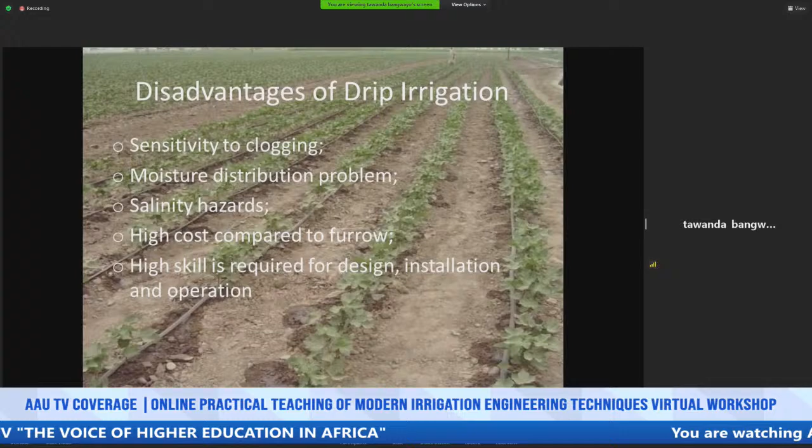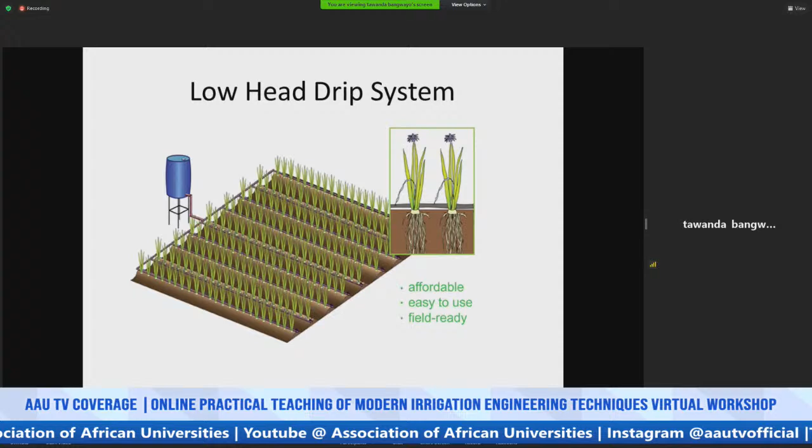So the area you have also determines the storage tank you must have. This system is a low head drip system due to that stand, which can be a meter high. That's why it's called a low head drip system. The next slides will take you through some of the components. This one is affordable, easy to use, field ready. Someone who is hands-on can install such a system on their own.

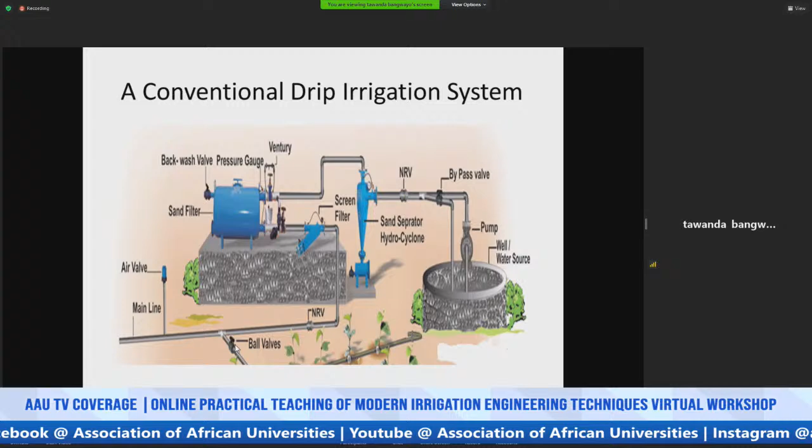There are different pumps that can be used. This one is centrifugal, but some can use submersible pumps which are inserted into boreholes. So we have the air valves, which will be removing the air inside the system, and also the ball valves. In different systems, the larger the system, the more the air valves and ball valves will be increasing.

The drip system layout has the lateral, which is the final line which supplies water to the plant, the distribution line, and the sub main line. There are different terminologies for these pipes. They are also called poly pipes or poly tubes. And there are other devices that are used, such as end caps or end stoppers used at the end of each lateral. We have the drippers or the emitters.

We find that some pipes or laterals come already manufactured to emit water, but some have small components or devices that you have to punch onto the lateral so that it can release water.

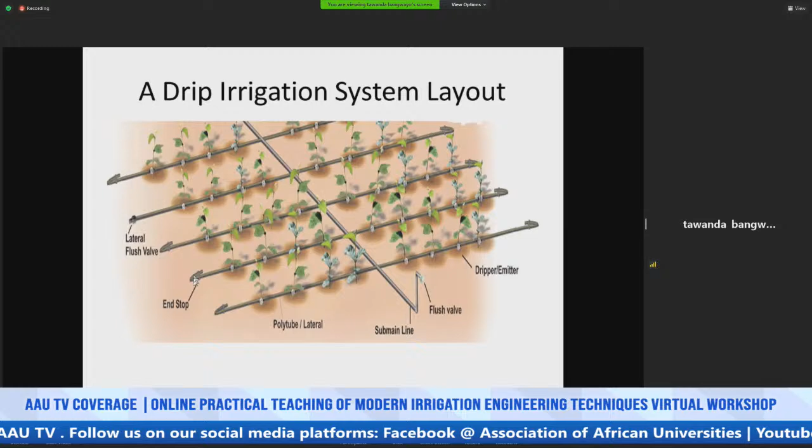So there's this one, the flush valve, whereby in instances, say in clogging instances, you can use these flush valves, or open up these end stoppers to flush the system or the pipeline.

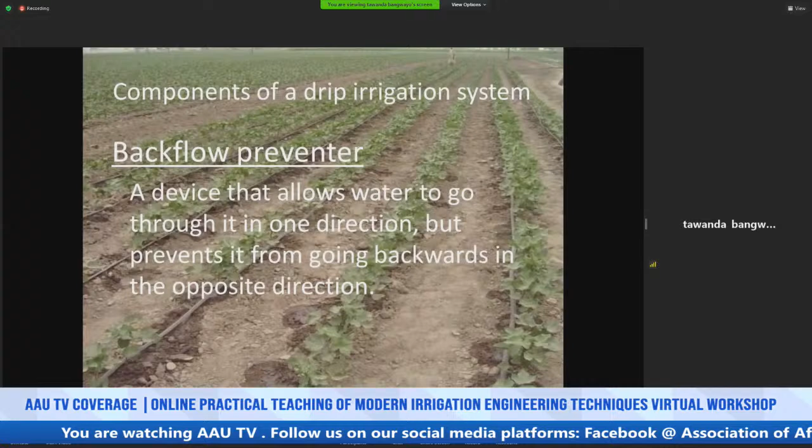So I find that the drip irrigation system involves other components such as the backflow preventer, whereby it prevents the backflow of water, as drip is used in mainly most or any topographical land. So I find that in a system, the water can flow back. If it flows back, it affects the distribution of moisture. So there's the backflow preventer.

There are the valves, whereby some are manually or automatically operated. Manually, we'll be having a worker who will be opening such valves, and automatically a valve can be opened through technology. So I find that there are filters, and there are different types of filters. There are disc filters, sand filters, and media filters, which are industrially manufactured devices installed in the system to prevent dirt or debris from clogging the emitters.

Then we find the pressure regulators. These components will be installed in certain parts of the drip irrigation system, where they will be regulating the pressure of the water passing through at a certain point. So these regulators will be reducing the pressure of water if it's high, or building up pressure in the system if the pressure is low.

Then we have the pipe. These are the poly tubing or the rigid PVC. Some are now adapting to use the HDPE pipe, which is a high density pipe, the ones that normally come in black. Others are developing other pipes to use.

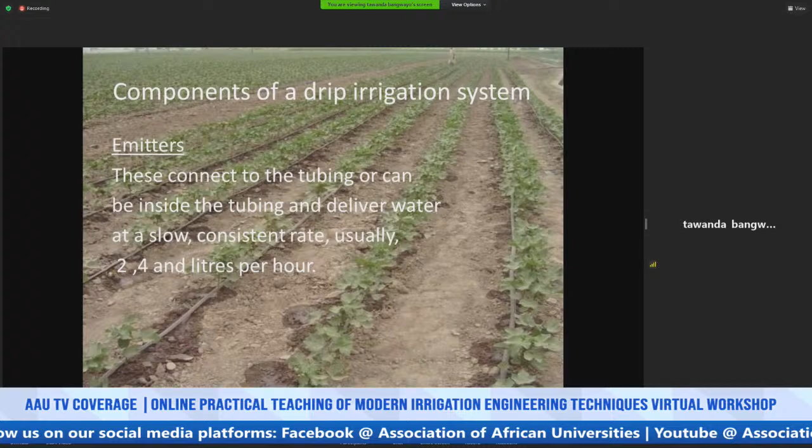Then we have the microtubing. These are our 1/4 inch spaghetti tubing. These are much smaller compared to the regular ones that we know, where the normal ones come in 20 millimeters or 16 millimeters. Then you have the emitters. As I said, some emitters come already installed in pipes or already designed to let out water. Some emitters are made to be connected onto the tubing.

Then there are two categories of emitters, the pressure compensating emitters and the non-pressure compensating emitters. The pressure compensating emitters are designed to discharge water at a very uniform rate under a very wide range of water pressure or wide ranges of topographical landforms or features in the field. And also true pressure compensating emitters give essentially the same flow at 3 bars, as they do at 1 bar.

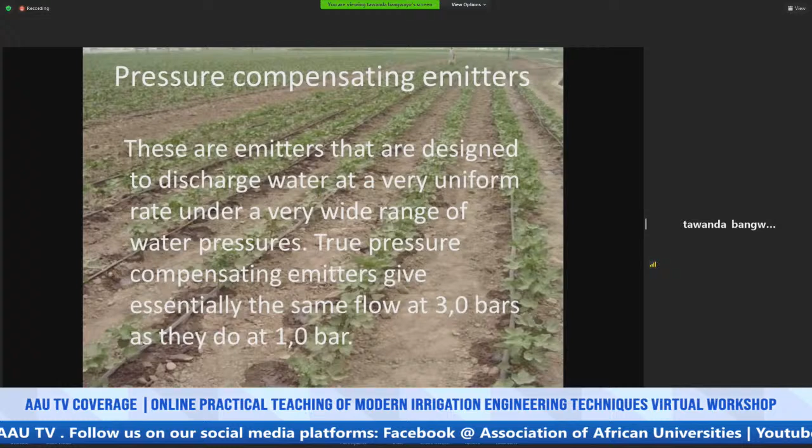So in a system where water will be supplied or pumped, some pump water at 7 bars, depending on the size of the system. Some emitters allow water at 2 bars. So these pressure compensating emitters will be regulating that pressure: if the pressure is coming to the final point at 3 bars, it reduces that 3 bars to 2 bars. And if the pressure is lower, at 1 bar, it builds up more water and lets out the water at 2 bars.

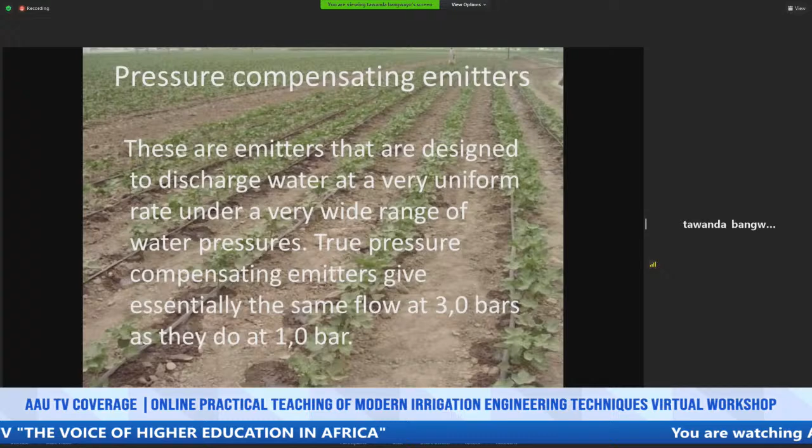So these pressure compensating emitters are normally useful in areas with elevation difference, referring to topographical differences. Then there's the non-pressure compensating emitters. These non-compensating emitters' output will vary with change in elevation and pressure. So these ones will be heavily influenced by the elevation and pressure.

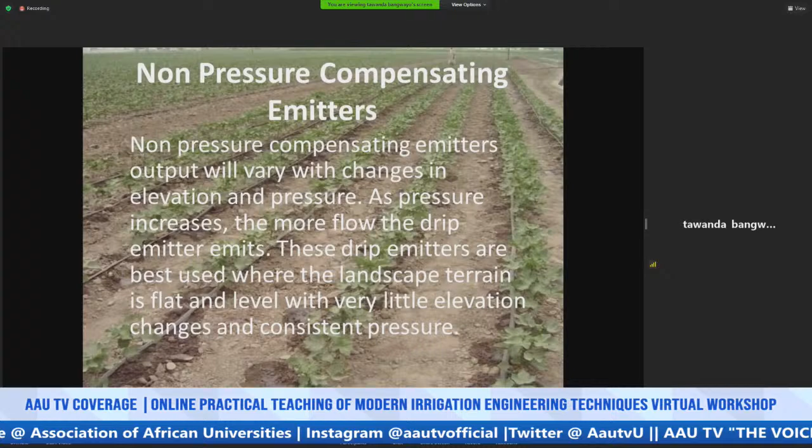And also these ones do have sort of an advantage compared to the pressure compensating emitters, because if you have a leakage, the pressure will be building up, rushing to where there's a leakage, unlike this non-pressure compensating, so the emitting of water will be generally continuous as compared to the pressure compensating emitters.

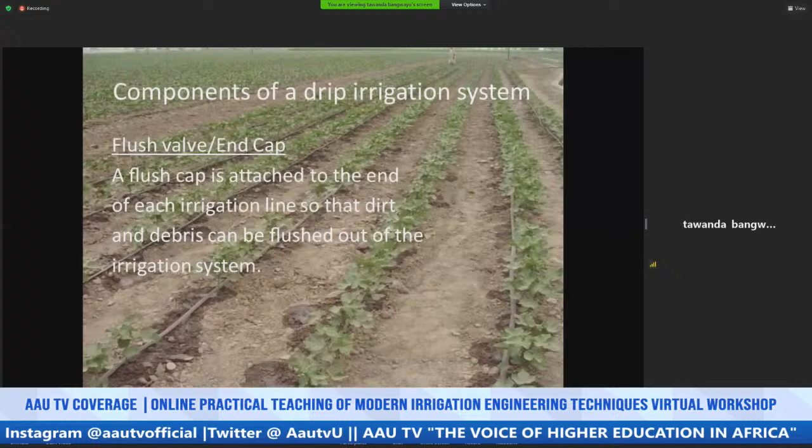So in general, generally 30 to 70% of the area is wetted depending upon the plant spacing, the nature and the development of the root zone. And also components of a drip irrigation system. This is a continuation whereby we have a flush cap which is attached at the end of each irrigation line or drip line so that dirt or debris can be flushed out.

And also the design parameters. We find that drip is suitable for an area as little as 1 meter by 5 meters to a large area of maybe 50 hectares. So drip irrigation can be designed according to the available space and the type of crops you want to grow. And also the peak water requirements of the crop or plant are considered when designing such an irrigation system. And also the selection of emitter types, the number of emitters per plant.

We find that in some designs whereby you want to irrigate a plantation or a citrus plantation, a specific tree will be having maybe 3 to 5 emitters. This will be due to the specific water required by the plant and the specific season of the crop. So the selection of emitter types, the number of emitters per plant, and the amount of water discharged per hour through the emitter will determine how many emitters will be available for each specific plant.

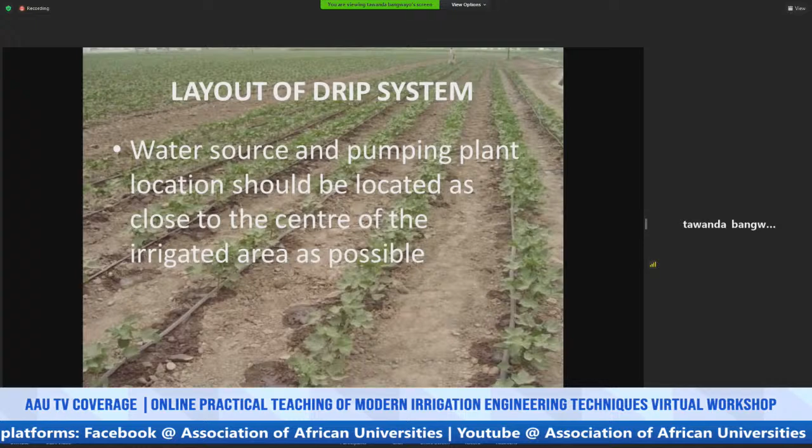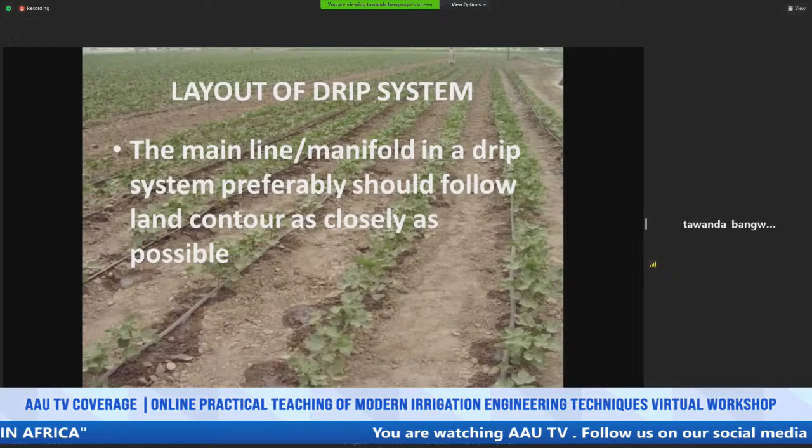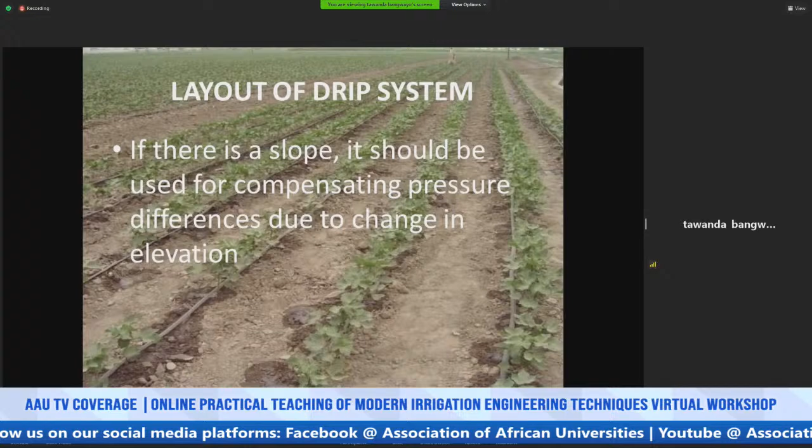So the main line or the manifold in the drip system preferably should follow the land contours as closely as possible. So we still encourage the same system whereby we encourage farmers to plow across the slope. So in the drip system also, we encourage the layout of the drip systems to be across the slope. If there is a slope, it should be used for compensating pressure differences due to the change of elevation.

And also when water flows downslope, it allows longer laterals for a given pipe size, or a smaller size for a given length of lateral. And also a fall of 10 meters in elevation is equivalent to an increase in pressure of 1 bar. So in some areas people opt to have maybe a 10 meter elevated tank. So this one will be compensating for the 1 bar that they will be having in their system.

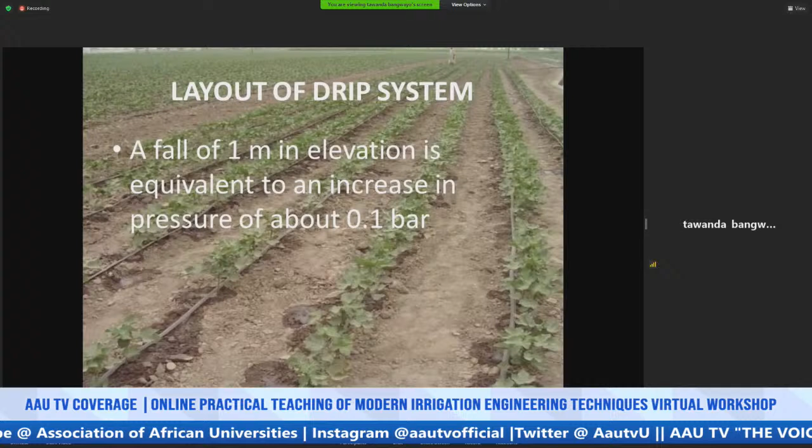So some also raise their tanks up to maybe 20 meters, depending on the size of field they are having. And also some fields are characterized by hills nearby, so the water tank will be installed on the nearby hill available in the area.

And also running laterals uphill should be avoided wherever possible. So by saying this, the lateral shouldn't be running uphill, whereby the manifold supplying the lateral is at the lower end of the slope, and when we are irrigating, the water has to go against the slope. So this will affect the distribution of water, whereby the water won't reach the upper end of the field. So basically the laterals, or the drip lines, should run across the slope.

Then to avoid pressure building in supply lines, we have the application of pressure regulators or manifolds, or the ball valves, whereby these ball valves will be stopping the flow of water to other lower parts of the supply line.

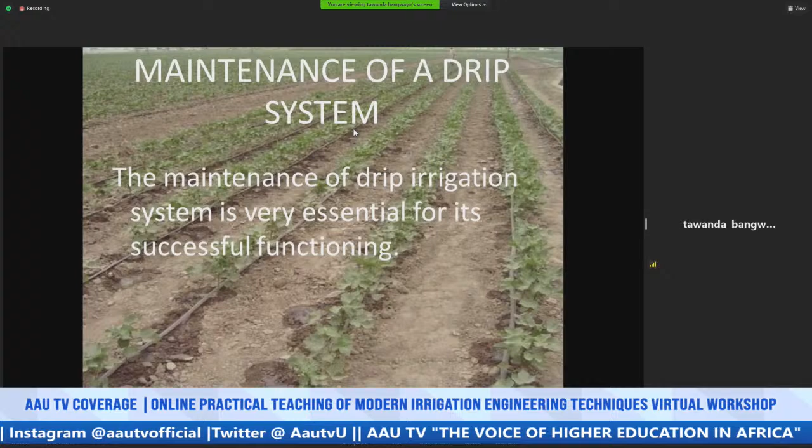So we find that some other sand filters or other filters have other outlets to be used to allow water outwards, or some sand filters have more than one inlet. So these inlets will be used interchangeably. So you'll be having one inlet being used during the operation, and the other inlet will be used for maintenance purposes, whereby the inlet normally used during operation will be closed during maintenance, and the maintenance inlet will be used for the outflow of water.

Then there are the screen filters. These are manufactured in the industry. So a screen filter is like the normal filter, but you have a screen or some discs. A screen is like a hard net which traps the debris, or some discs which will be packed in a closed component that will allow water to pass through but trap the debris.

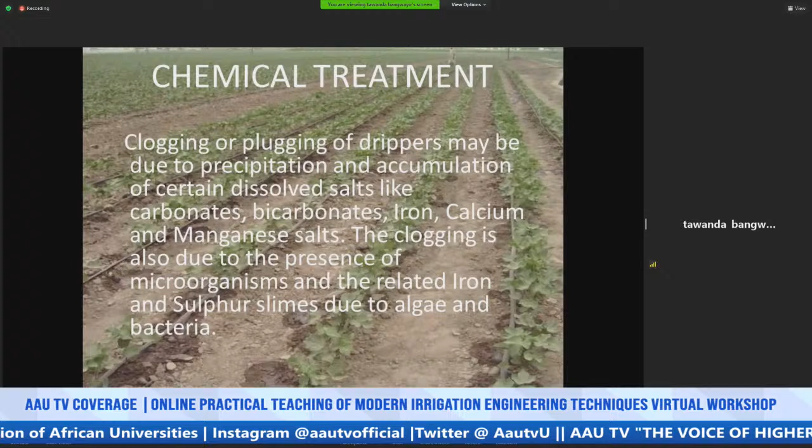Then you have the chemical treatment, whereby the clogging or plugging of drippers may be due to precipitation and accumulation of certain dissolved salts like carbonates, calcium and manganese salts. The clogging is also due to the presence of microorganisms and the related iron. So in some industries or some systems, the manufacturers also provide declogging solutions. In some instances, people use sodium hydroxide or Jik.

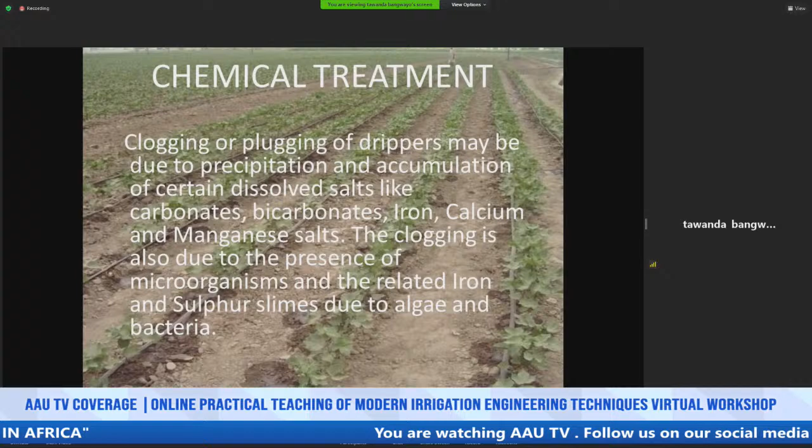Some domestic chemicals such as detergents or Jik can be used to declog the drip lines. Also, clogging is usually avoided or cleared by chemical treatment of water, whereby the water is first treated before being allowed into drip lines.

Also, there is acidic treatment, whereby hydrochloric acid is injected into the drip system at a suggested rate. In some systems, the acidic treatment is applied until a pH of 4 is observed in the system, and the system is shut down for 24 hours. Some other farms or systems have monitoring devices to monitor the levels of acidity in the field.

The next day, the system is flushed by opening the flush valves or the lateral ends. So there is continuous assessment of their operating efficiency. Then there's the chlorine treatment I was talking about, and fertigation. This is the process of applying fertilizers through irrigation systems.

The advantages of such mechanisms: it eliminates manual application, which is at a disadvantage compared to the use of fertigation tanks or chemical tanks. These systems are quick and convenient, with uniformity in application, high efficiency and saving of fertilizers of 30 to 40%.

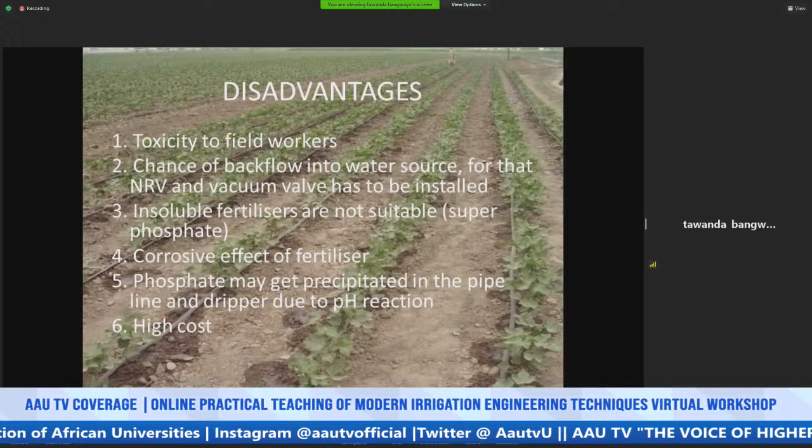There's also the corrosive effect of fertilizers. After each application of fertilizers or chemicals, the drip irrigation system should be cleaned. There are also lime solutions which help in neutralizing the irrigation systems. And such tanks, the fertigation tanks, are expensive. Then there's also clogging.

Clogging has physical causes, which are sand, silt and plastic chips. During installation, cutting of the pipes is involved, and in some instances when the pipes are cut, the plastic chips are not removed from the system, so they find a way to block the emitters.

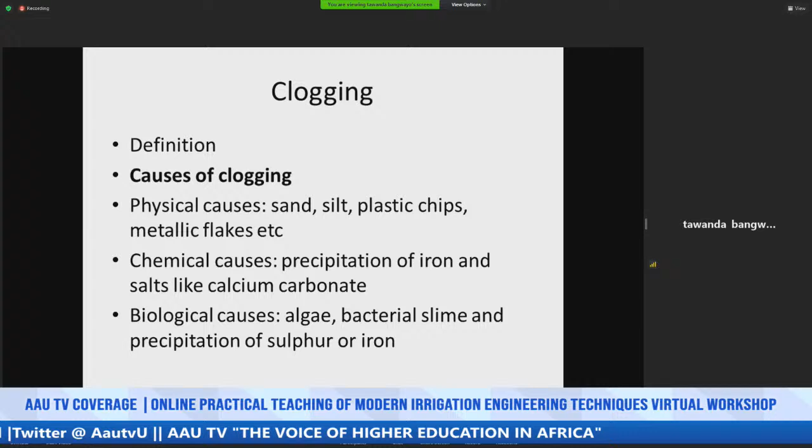And there are chemical causes such as the precipitation of iron or salts, and biological causes whereby algae build up in the system. And that's the first part of my presentation. I don't know if there are any questions.

Thank you very much, Mr Bangwayo. We can hear from the floor if there are people who have questions or contributions before we proceed to the second part of your presentation. Anybody can unmute and say something. If none, you can then go ahead with the second part.

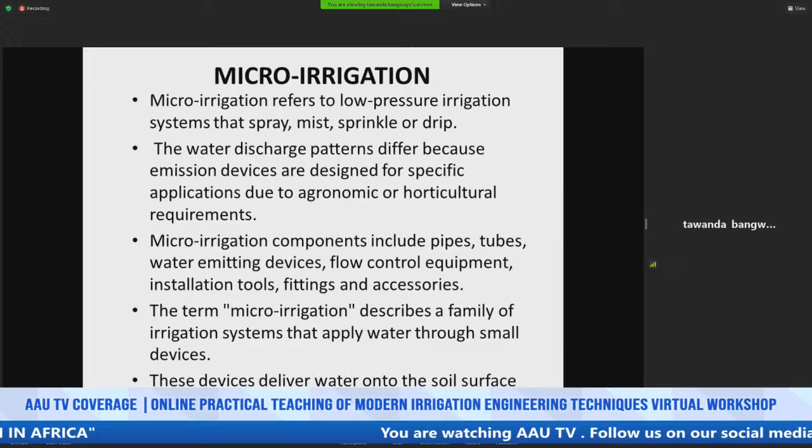So the micro irrigation components include the same pipes, tubes, water emitting devices, flow control equipment, installation tools, fittings, and other accessories. The term micro irrigation describes a family of irrigation systems that apply water through small devices. Growers, producers, or landscapers use it, since micro irrigation is not only for irrigating crops in the field. Growers use it for supplying water to their crops, some producers use it to ripen their fruits, and landscapers use it for lawn management and watering ornamental flowers or other trees.

And micro irrigation systems are not only in arid areas; they are in urban settings, and also in some humid and sub-humid zones where water supplies are limited or water is expensive. In irrigated agriculture, micro irrigation is used extensively for row crops, mulched crops, orchards, gardens, greenhouses, and nurseries. In nurseries especially, the amount of water needed is lower compared to a field, so these micro irrigation systems manage the certain water amount needed for a nursery.

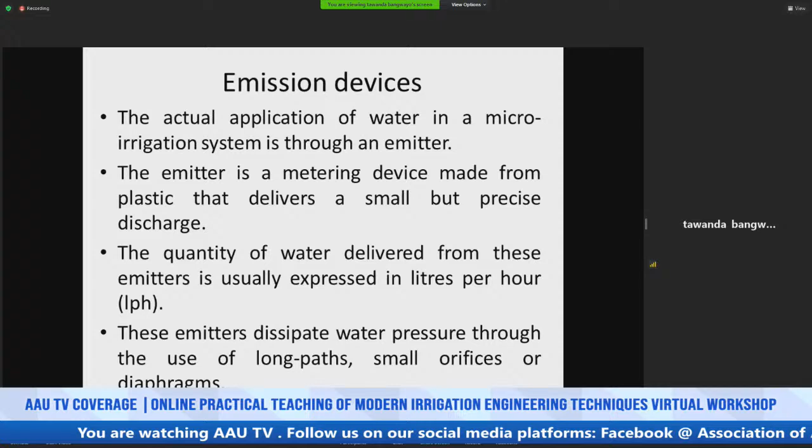So the actual application of water in the micro irrigation system is through an emitter, as you can see, some of the materials repeated from drip irrigation. Emission devices deliver water in 3 different modes: drip, which is the normal droplet of water; bubble, where the water is aerated so it comes out as a bubble; or micro sprinkler, where the water comes out like the normal large sprinkler, in raindrops.

So in a drip mode, water is applied as droplets. In the bubble mode, water bubbles out from the emitter. In the micro sprinkler mode, it sprinkles, sprays, or produces mist. For mist to be produced, these micro irrigation systems let out water in the smallest possible amounts, creating mist.

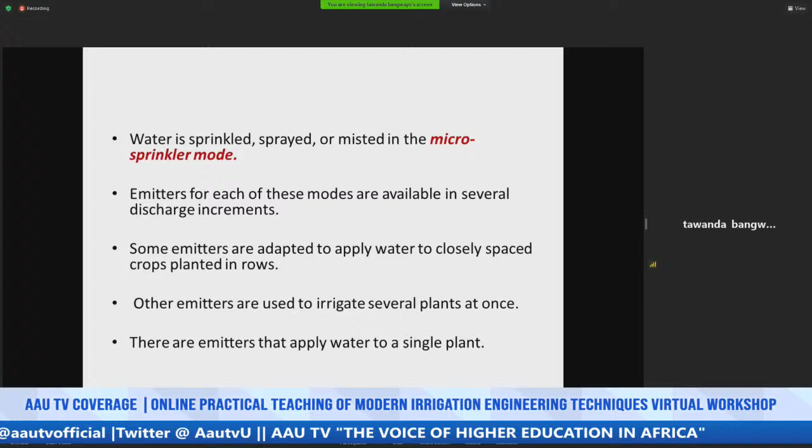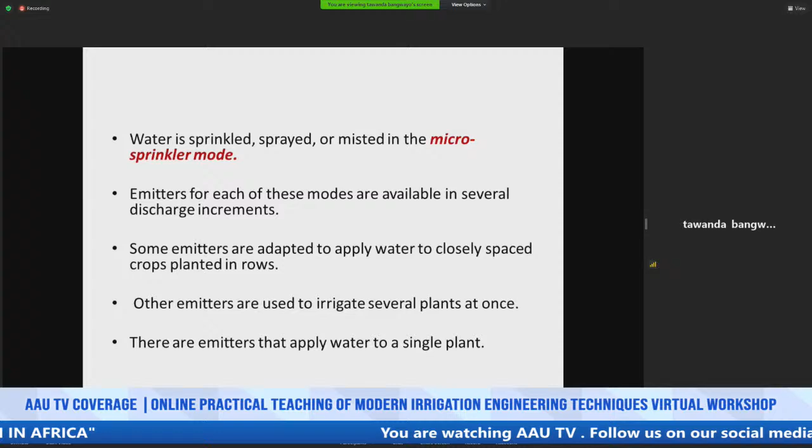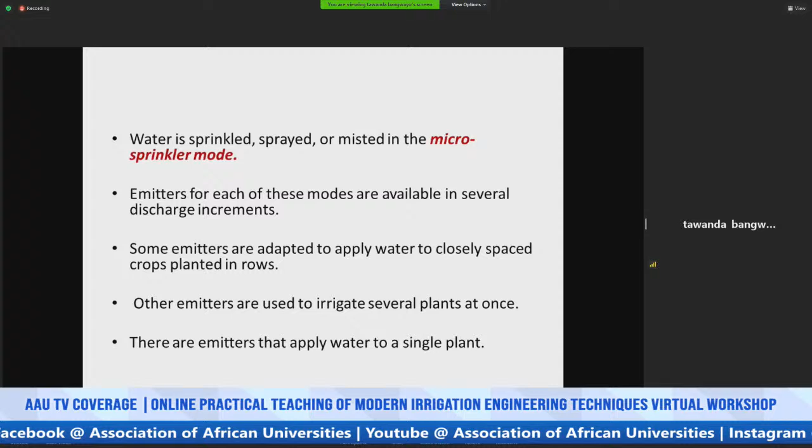These emitters for each of these modes are available in several discharge rates. These emitters are specific to the available market, so one manufacturer may not have the other emitters due to the market surrounding them, and in other areas another emitter will be preferred. Some emitters are adapted to apply water closely, and other emitters are used to irrigate several plants at once.

We can't hear you, Bangwayo. All right, so I was closing. It appears that if someone posts a question, it produces a heading that blocks my headings. Sorry.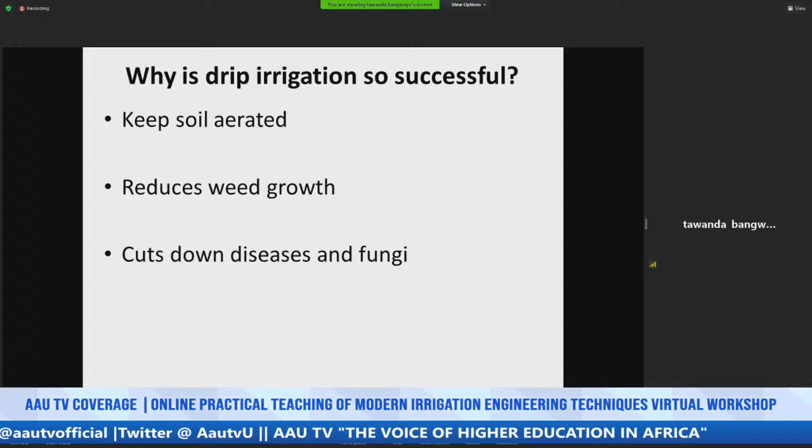The success of drip, continuing from the last schedule. So why is drip irrigation so successful? It keeps soil aerated, reduces weed growth, and cuts down diseases and fungi. The right amount of water supplied to a crop is managed, and this manages the amount of air in the soil. It reduces the population of weeds in the field. It cuts down the occurrence of diseases and fungi, since fungal and some bacterial diseases are influenced by the moisture conditions in the field.

And also uniform and efficient water distribution, minimized evaporation and water runoff. It enables easy control of water consumption, whereby for a certain amount of water you are feeding into a system, you already know that everything, maybe up to 100% if there are no leaks, will be going straight into your fields and straight to your plants. So we'll have easy management of water consumption.

Then the system is more efficient, with accurate use of water and nutrients. Then the benefits, in addition to my first slides: it enhances the use of existing resources. In some regions water is a scarce resource, so you'll be assured that you are getting high returns for every drop of water you are using. It saves labor and also saves the consumption of electricity or energy.

It enables multi-seasonal application. Not only drip irrigation, but other irrigation methods are used to fight against harsh weather conditions such as frost. So drip is not only for other advantages, but it helps in management of harsh weather conditions, and easy operation and maintenance.

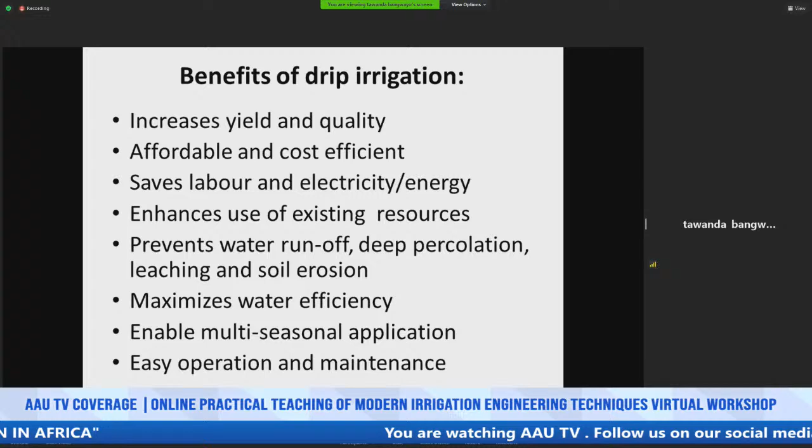Compared to other systems, drip is easier to maintain than maybe a pressurized system or sprinklers, whereby we have to monitor the pressure being produced or the water being pumped, and also monitor the sprinkler heads, which can reduce the efficiency of the system.

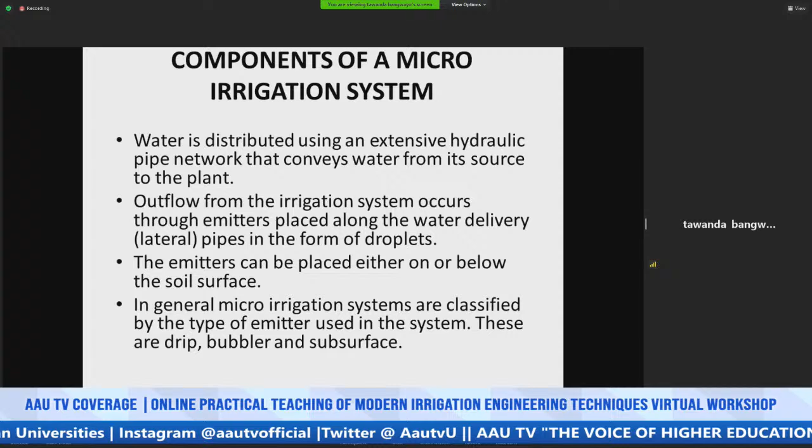And also the components of a micro irrigation system: the water is distributed using an extensive hydraulic pipe network that conveys water from its source to the plant. This one's just a consideration for drip irrigation. In general, micro irrigation systems are classified by types of emitters. This is not only drip, but can also be used with a localized irrigation system, whereby there are emitters at the specific plant.

These emitters will be at a plant, and as I was saying, a plant can have more than one emitter. So a plant can be having more than one emitter. So we have, for instance,

Sorry, there's a question popping out, so I have to do this.

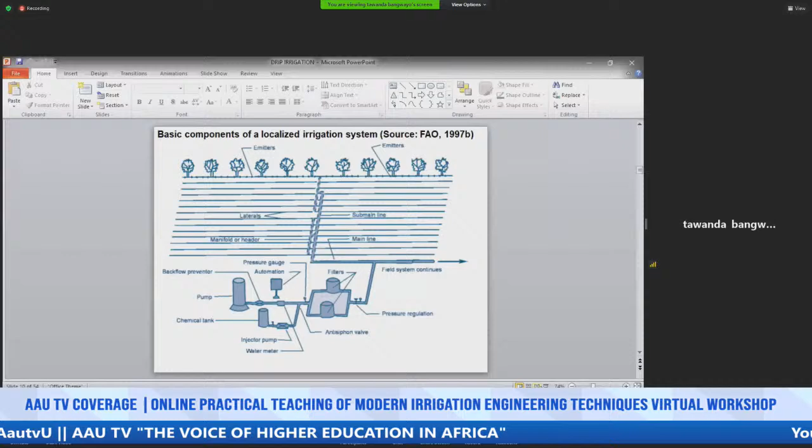So you see, for instance, this plant will be having two emitters at its disposal, one on each side. And also, when you are designing an irrigation system, here where there are crops is the upper land, an upper area compared to here where there are these components. If you are installing such a system, we mustn't install it whereby the right side or the left side is at a higher elevation compared to the other side.

So elevation is better managed when the difference in elevation is along this sub main line. I hope everyone sees my mouse. So the elevation can be going upwards in this way or in this other way. The distribution of water will be managed through these manifolds. I hope everyone is seeing these smaller laterals and the sub main line.

By this you'll have much more management of water, whereby if I close here, the water will be going all through here. In other designs, you can also put a ball valve here so that it will only feed these four laterals, two on each side. So you'll have easier management of pressure than having the slope going from left to right, where the water will only be available at the lower end.

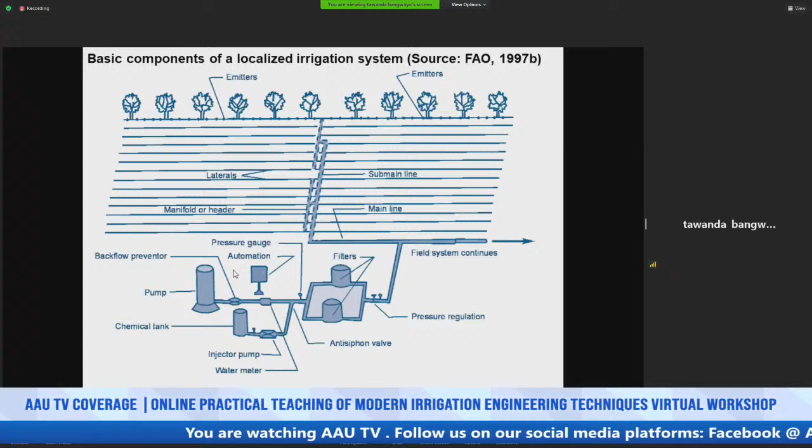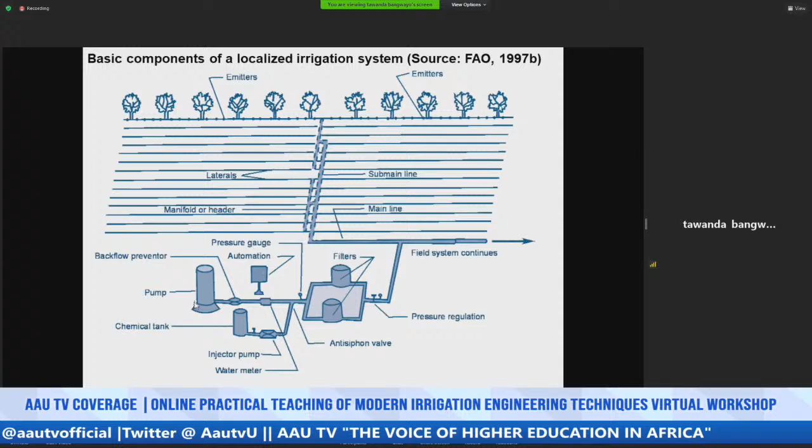And we also find that some systems are automated, and this one is a backflow preventer, which prevents the water from flowing back into the pump. Another advantage of having such a backflow preventer is that it prevents the chemicals from flowing back into our water source. And as I said, these are just a continuation.

And the emitter spacing is selected to closely fit the plant spacing for most row crops. These drip lines can also be used in irrigation where your drip line comes from one lateral, goes to one plant and circles it, then goes to another plant and circles again.

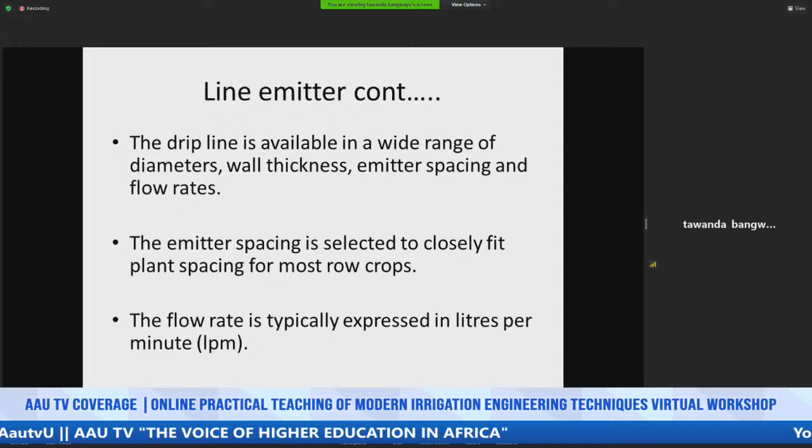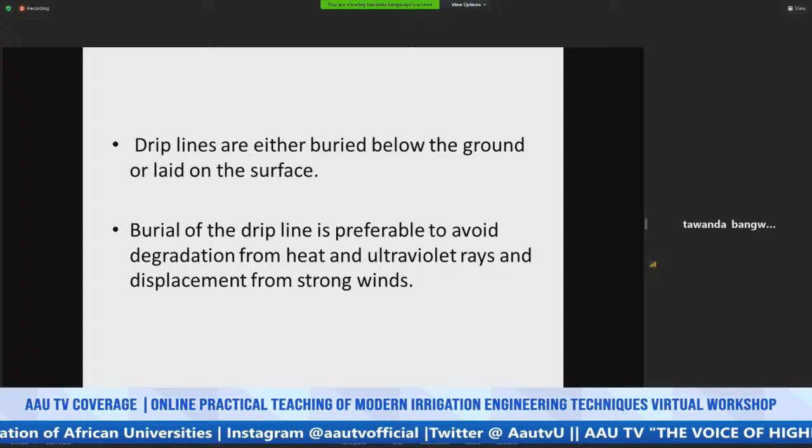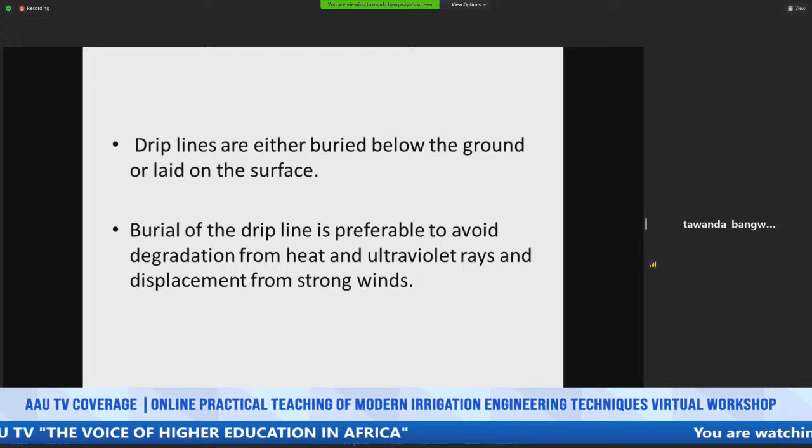So we find that others are developing more ideas. They will be creating drip irrigation whereby burying the drip lines is preferred to avoid degradation from heat and UV rays, and also displacement from strong winds. So when installing such a drip system, one can dig a trench of maybe 10 centimeters into the ground and lay the drip line in the soil.

However, some specialized equipment to install or extract the thin drip line distribution lines is required. Others are now developing equipment to install the drip line. Some use trailers, where you have your drip line tubes in rolls, and the rolls are dragged along the field, unwinding the tube.

So this increases the rate at which a drip irrigation installation exercise can be carried out. And the thick walled drip hose is a robust variation of the thin walled drip line. The internal emitters are molded or glued in.

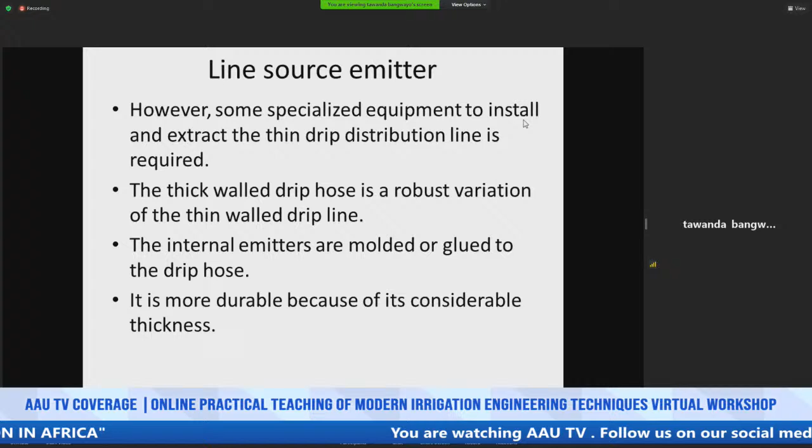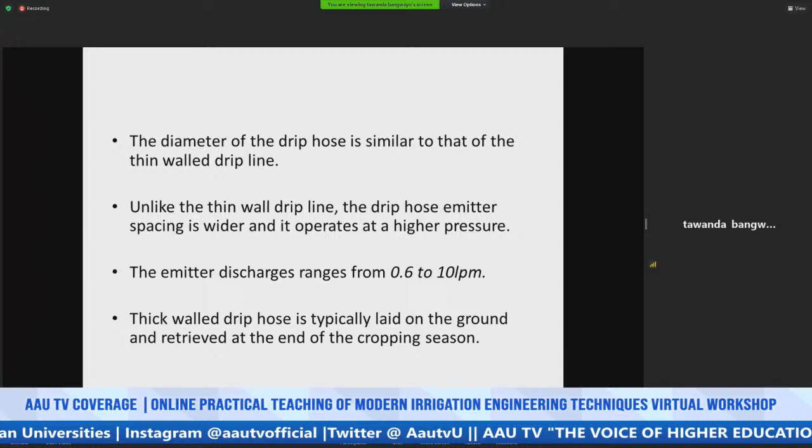As I was saying, some are already manufactured with emitters inside the drip line, and it is more durable because of the considerable thickness. So the thickness of the drip line is also an advantage to the system. The diameter of the drip hose is similar to that of the thin walled drip line, so having a thicker wall only increases the durability of the drip hose.

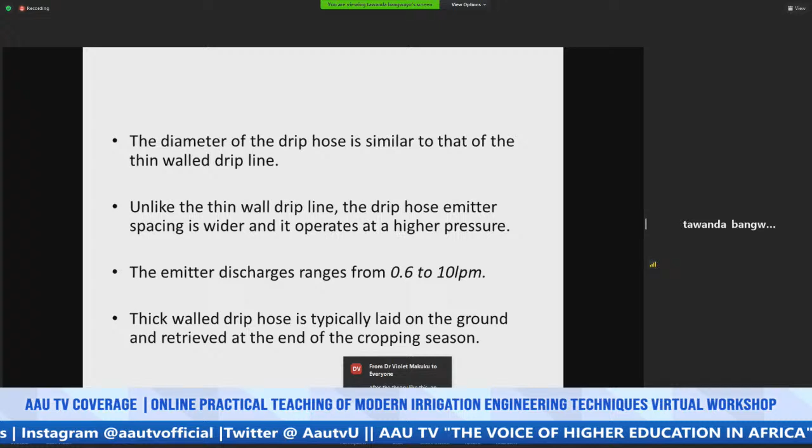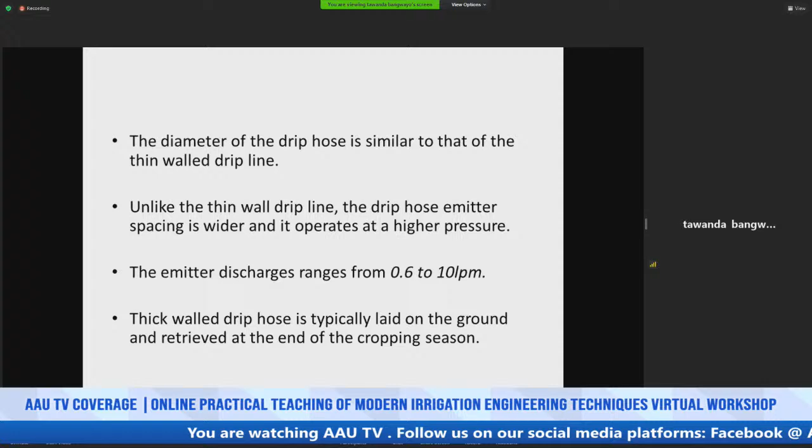Unlike the thin wall drip line, the drip hose emitter spacing is wider and it operates at a higher pressure. The drip hose is used maybe in those citrus plantations I was talking about, where the emitters can be punched into the drip hose. These systems will be pressurized, and the emitters discharge a range of 0.6 to 10 liters per minute. Some manufacturers give this information on their specific materials.

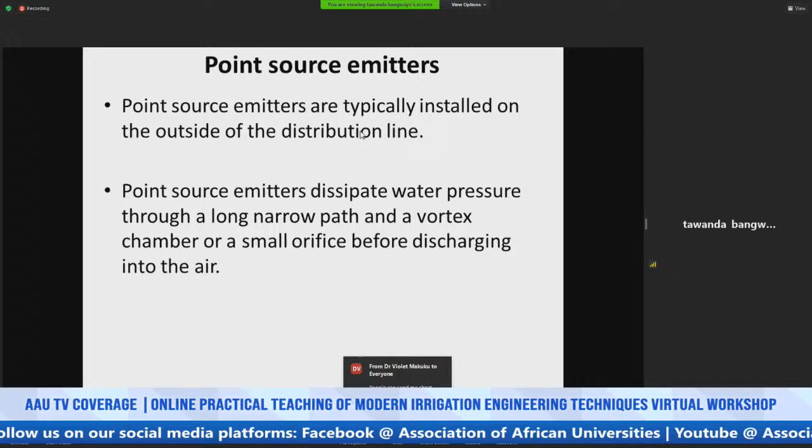So the advantages of micro irrigation: it saves water, and water supply sources with limited flow rates, such as small water wells or city rural water, can be used.

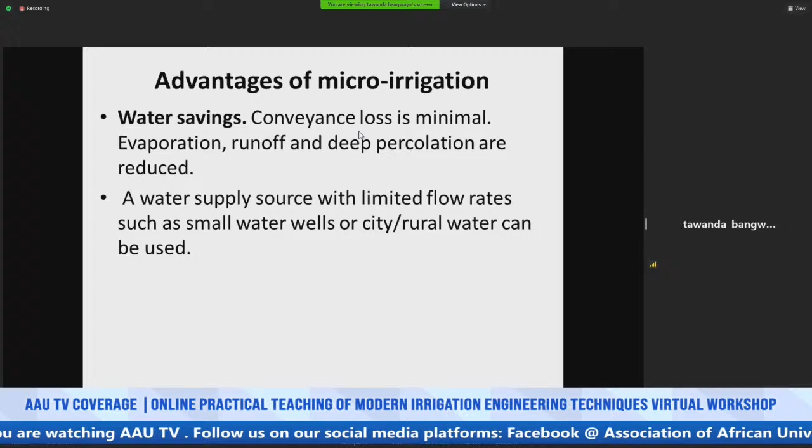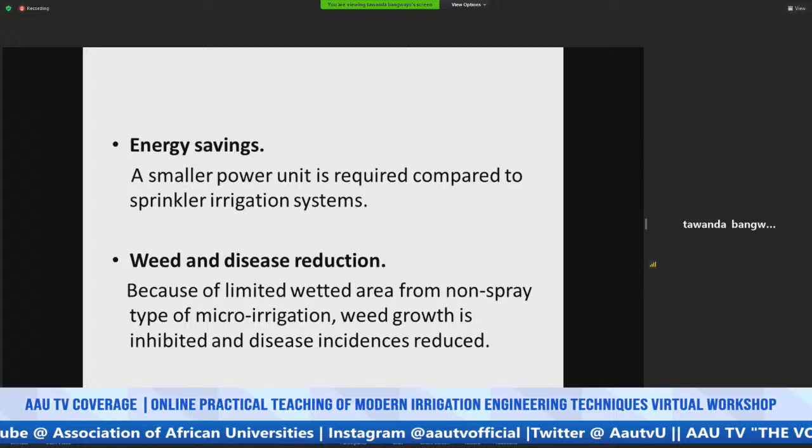And also this drip irrigation or micro irrigation saves energy. It also reduces the chances of weed infestations or diseases, and it can be automated, whereby one can control the application of fertilizers and chemicals through their mobile devices or laptops. It improves the production of marginal land.

So we find that in hilly areas the micro irrigation system can be used, and there will be no chances of runoff and no interference from wind, and the fields need not be leveled. So in some hilly areas, the drip irrigation or micro irrigation system can be used.

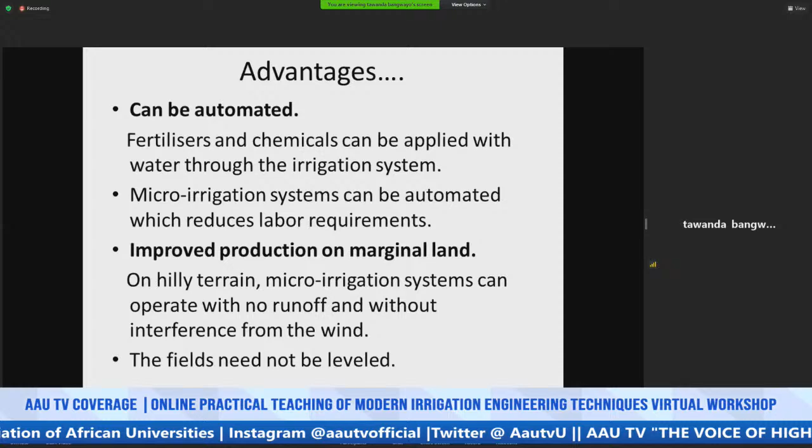Then the management is harder compared to other systems, whereby micro irrigation systems normally have higher management requirements, although this can be said to be easier when the right person is trained to monitor such systems. And also soil particles, algae, and mineral precipitations can block the emitters. So with regular maintenance, it becomes easier to manage these systems.

And potential damage: comparing the thin wall and the thick wall, the thin wall has a higher potential of being damaged by animals and insects, whereby others may have their goats or cattle passing through their fields. So they can trip by dragging the drip lines. Also the drip or bubbler irrigation systems need additional equipment for frost protection.

So in other areas, in order to protect their system, they irrigate their crops during the hours predicted for frost. For instance, you anticipate that frost is likely to happen in the early hours of the morning, so that's when they plan their irrigation program. So instead of the drip lines being hit by frost during the early hours, people will be irrigating, and the movement of water will prevent the drip lines being shattered by frost.

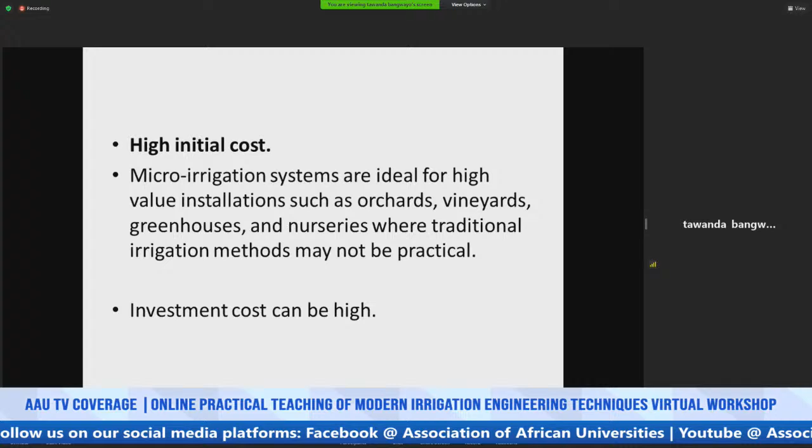Then the high initial cost; these are the disadvantages. The micro irrigation systems are ideal for high value installations such as orchards, vineyards, greenhouses, and nurseries. So these are more for high value crops. You can't install such a high cost system for lower fetching crops.

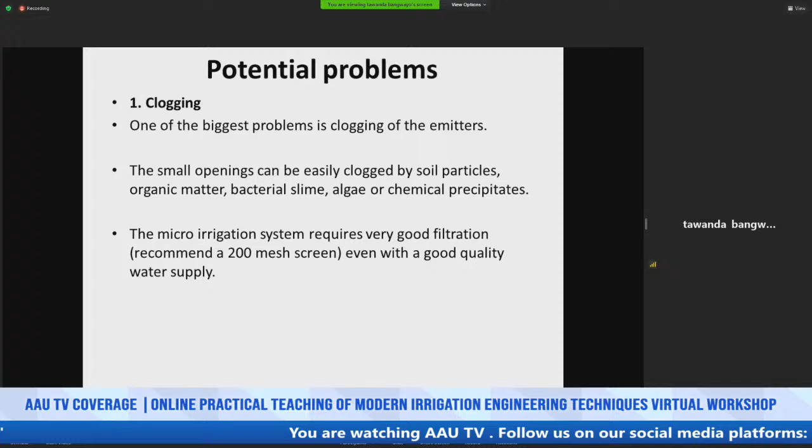Then the potential problems. These include clogging, as I was saying before, whereby the micro irrigation systems require a very good filtration system, with screens that are 200 mesh. So we find that the smaller the screen size, the fewer the cases of clogging.

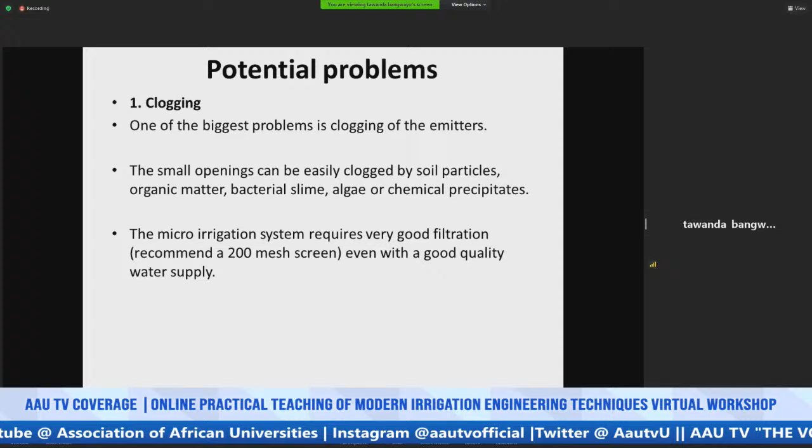And also moisture distribution. The moisture distribution depends largely on the soil type being irrigated. In some soils, deep sands with very little lateral water movement or low capillary forces can create more problems. As we know, sandy soils allow water to move downwards, unlike clay soils which allow capillary movement of water.

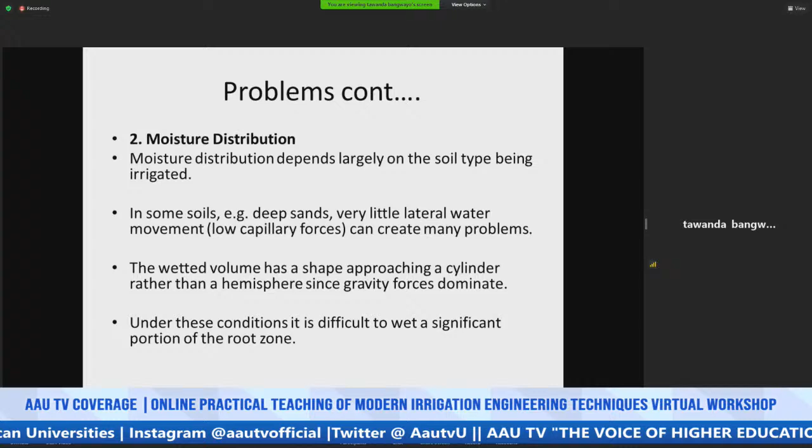And also the wetted volume, such as shape: a shape approaching a cylinder rather than a hemisphere, since gravity forces are dominant. Under this condition, it is difficult to wet a significant portion of the root zone. So in systems where you integrate a drip irrigation system and mist irrigation system, the drip will allow gravitational movement of water, but the moisture of the mist system will allow capillary movement of water.

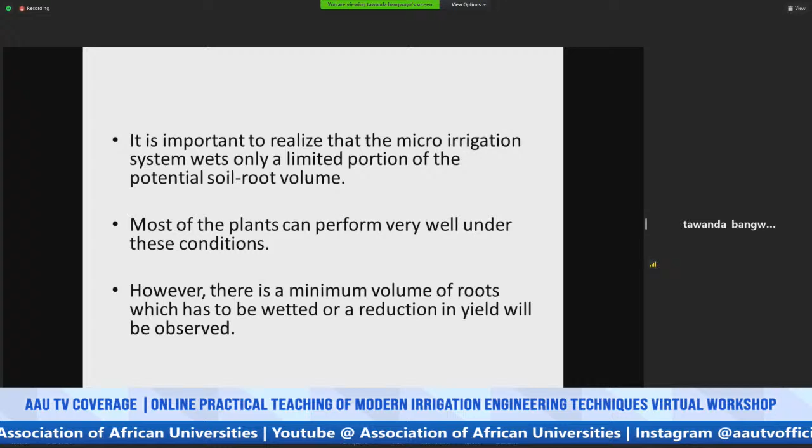Other problems: increasing the number of emitters per plant improves water distribution, and as a result, coarse sands will require much closer spacing of emitters than finer clay soils. And most plants can perform very well under these conditions, which can be designed for that specific field or specific crop. However, there is a minimum volume of roots which has to be wetted, or a reduction in yield will be observed.

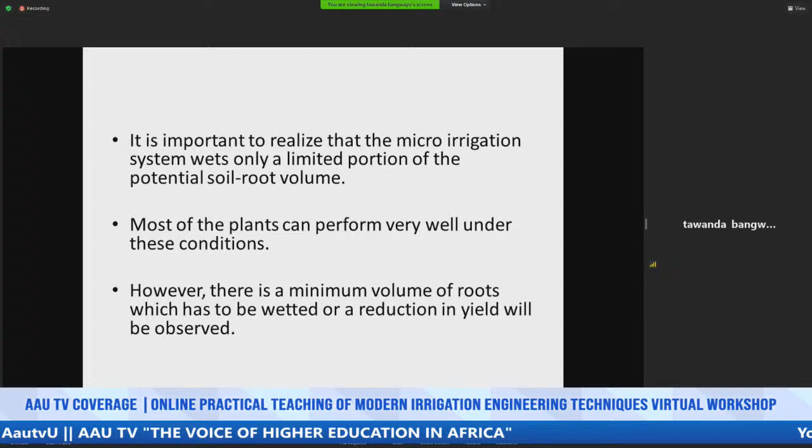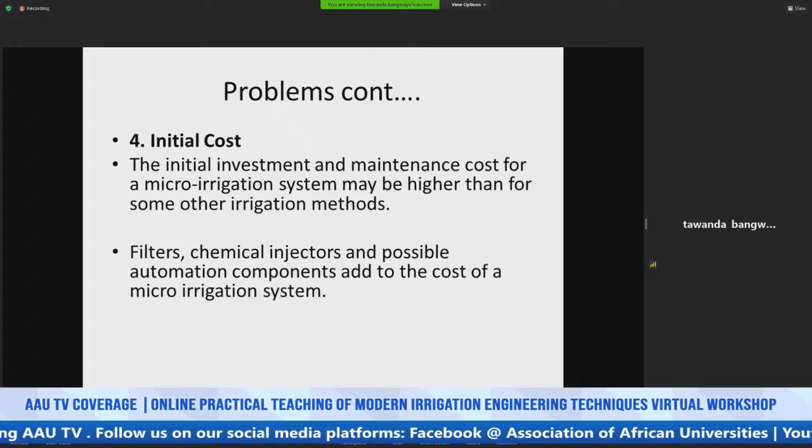And also other problems such as salt buildup, as I highlighted in the earlier presentation, and the initial cost of filters, chemical injectors, and possible automation components of the micro irrigation system. They also require filtration equipment. It is influenced by water quality, where the water shouldn't have debris in it. And in some instances, water treatment must first be done before being supplied into an irrigation system.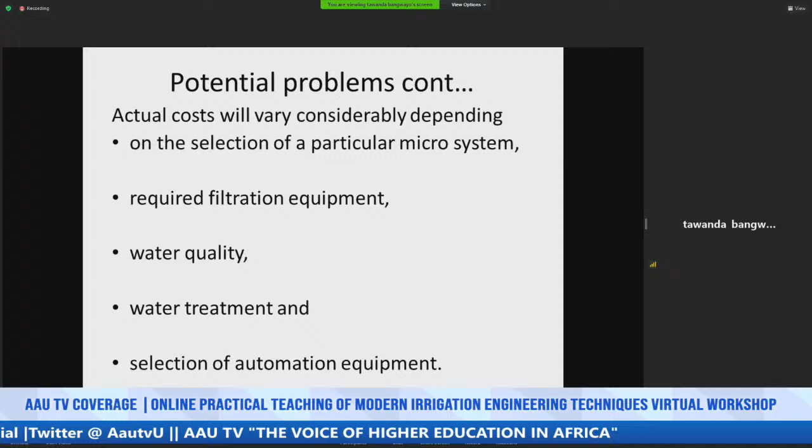And also the level of knowledge for selection of automation equipment. We find that people have little knowledge in selecting automation equipment, whereby one farmer can admire the system being used by another farmer next to them. So without proper knowledge, they can opt to buy the same system, but there are different capacities, and the automation equipment will have a different level of efficiency.

And also the insects, the infestation of insects can create additional maintenance problems by chewing the holes in the plastics. And also this is mainly maybe due to the clogging, whereby you find that insects do favor maybe salt or maybe in search of algae. So they will be chewing the emitters in search of food, so they will end up damaging our systems.

And also some components of the systems can be easily damaged by people unaware of their locations. So you find that in those sub-irrigation systems, people, maybe due to other plant practices such as cultivation or weed management, end up damaging our equipment.

And also the micro irrigation system does not provide significant frost protection, therefore it is not suitable for that purpose. So I find that this micro irrigation system is less recommended in those areas affected by frost, or some use it during the other warmer seasons. Then when they approach the frost seasons, they change their equipment or drip lines.

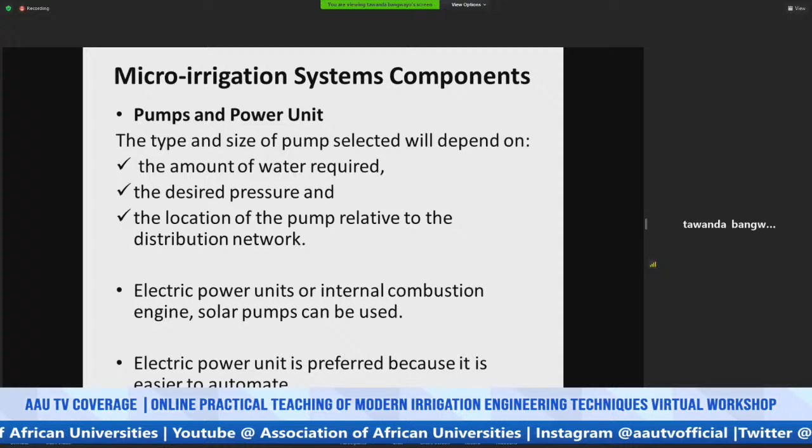And also electric power units or internal combustion engines, such as generators, can be used, and solar pumps can be used. It is now being opted for by many people, as they will be relying on solar energy. And also electric power units are being preferred, whereby people use electricity straight.

And those are the filters, as I was saying: the screen, disk, and sand filters. The screen filters are the most common filters in most cases, the least expensive. And also these screen filters are excellent for removing hard particles from water, such as sand, but not good at removing organic materials such as algae, molds, and slimes.

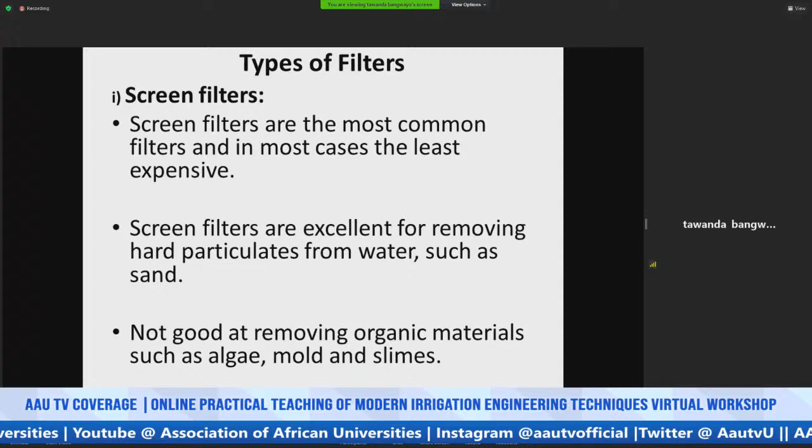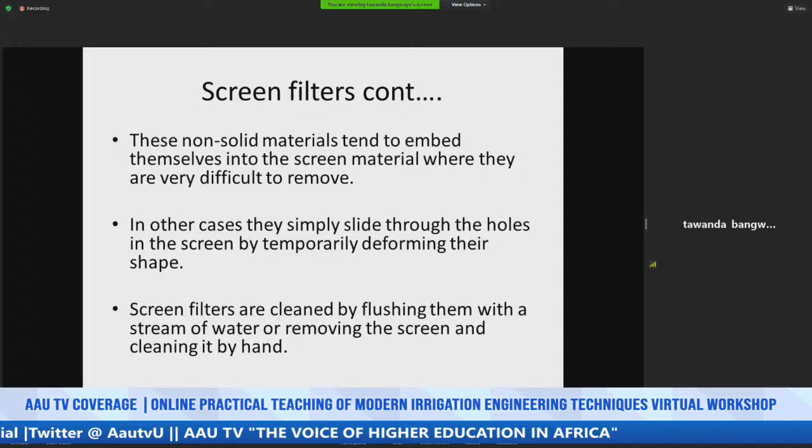So I find that these organic materials end up clogging or blocking the pathways of water in these screen filters. And also in other cases, they simply slide through the holes in the screens by temporarily deforming their shape. Also, the outlet is opened and it is hoped that the debris washes out of the flush outlet with the water. So you find that there are different mechanisms when manufacturing these screen filters, which help us to manage these filters.

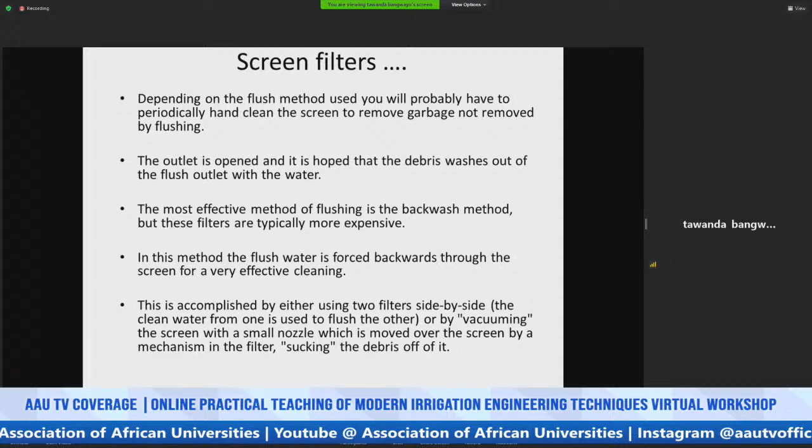And also the media sand filters. These are whereby chambers are created, people take normal sand, but it mustn't be fine sand, and it is put into the chambers, and these chambers are closed and then linked into the irrigation system, whereby the water has to pass through this sand filter. So naturally, in rivers, water is filtered by sand. So that's the same mechanism used in these sand filters.

So in most cases, the media material is of uniform size or maybe crushed sand. So you find that in those areas where there's less sand, people manufacture their own sand by crushing rocks. And also this sharp-edged media traps organic matter which would otherwise slide its way through the small spaces.

So you find that the use of semi-uniform sand size is very important, and this is why it is important to use sharp media. So you find that crushing sand creates rough edges whereby debris such as algae can be trapped or stick onto the media.

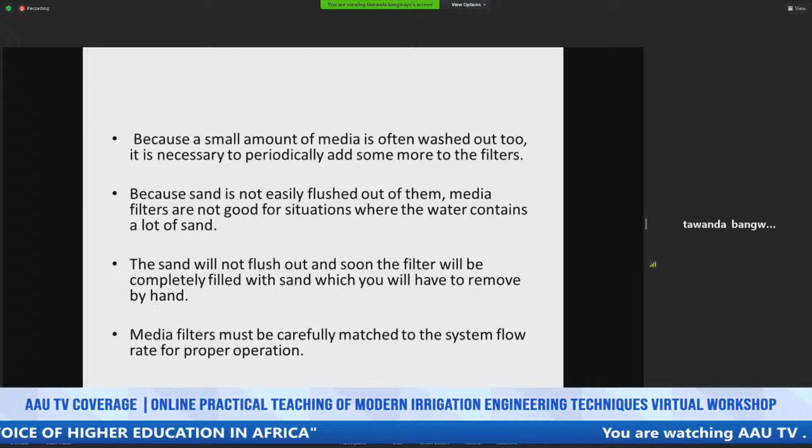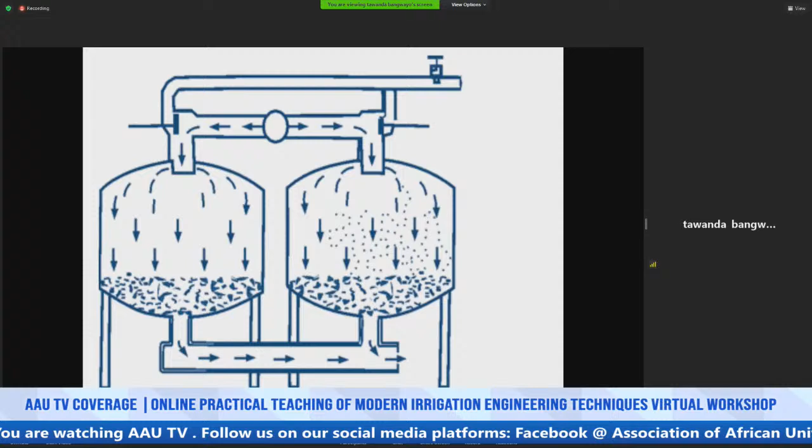Media filters must be carefully matched to the system flow rate for proper operation. So at a certain system flow rate, a certain size of filter is used or matched for that system.

Okay, let's see what we have, but we need to leave time to attend to the question and answer session. Okay, I was finishing up.

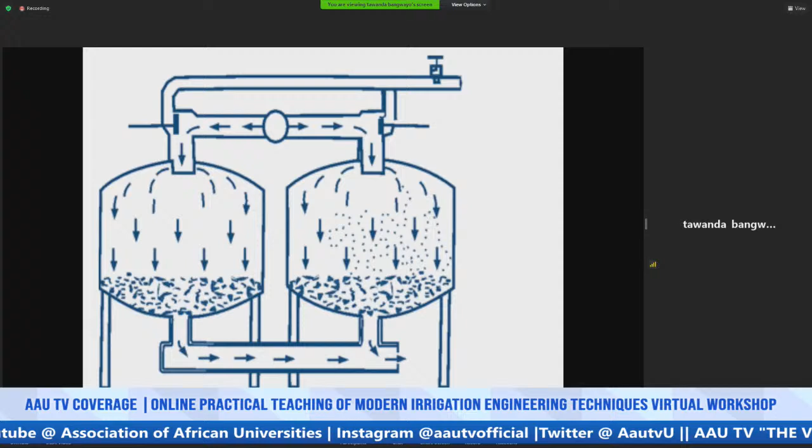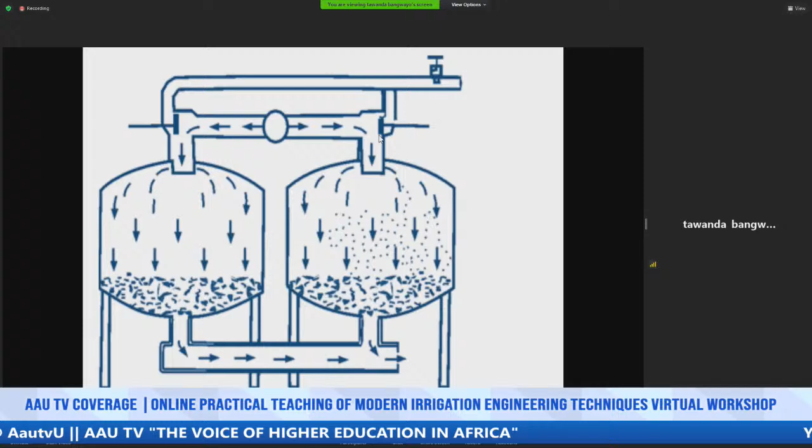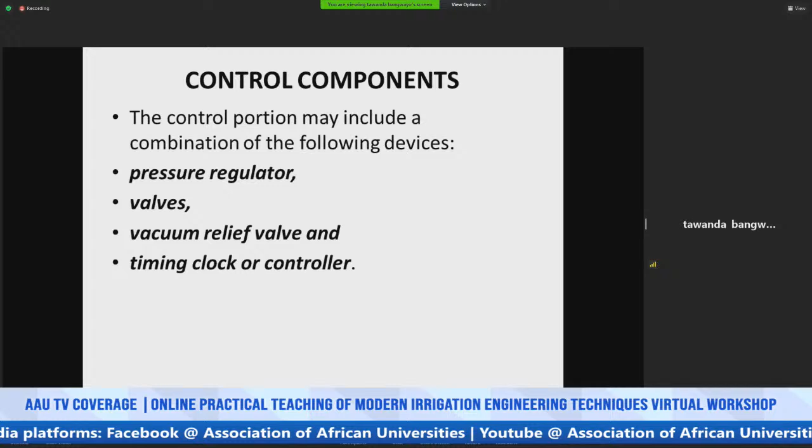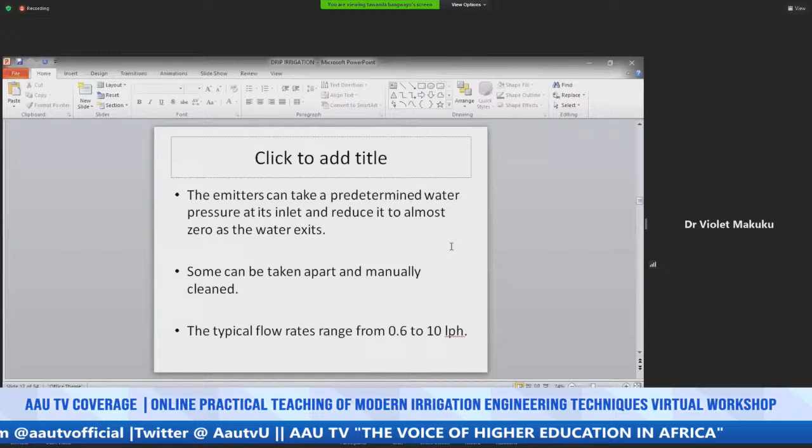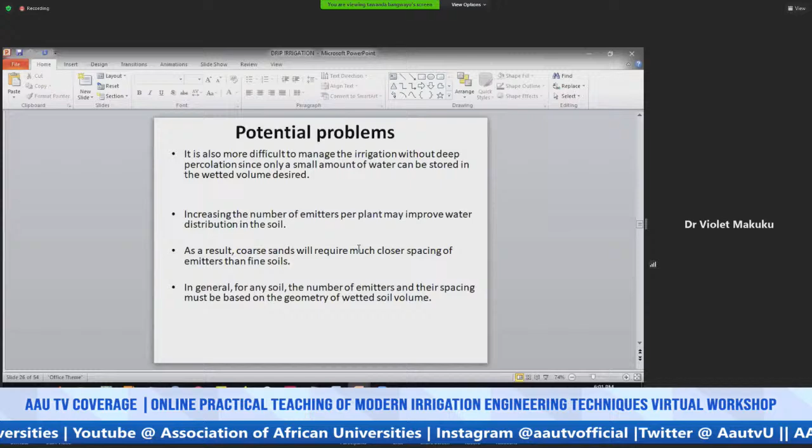Maybe I rushed you too much. It's okay. Sorry, we'll see what we can do. Next week we can start from there. I'm now going to the chat panel. While attending to the chat panel, you can scroll. Okay, that's fine. Trying to share. Okay, let me go full screen. So what we want to look at are the issues here.

Good presentation. Is there any way of doing things like the setup of the drip practically with students, considering the current situation? I started responding in the chat panel that when the COVID-19 pandemic broke out, we realized the challenges in teaching and learning practical-oriented disciplines. The other support workshops were supporting people on theory aspects, and even in practical-oriented disciplines, people continued to concentrate on theory.

So we came up as AAU with these workshops entitled online teaching of practical oriented disciplines. What you have asked, Mr. Chigede, is in the right direction; these sessions are meant to address challenges of teaching practical oriented disciplines. After this theory session, we look forward to having something on the Zoom platform where you as lecturers or students would learn how to teach this topic online, even without students on the ground.